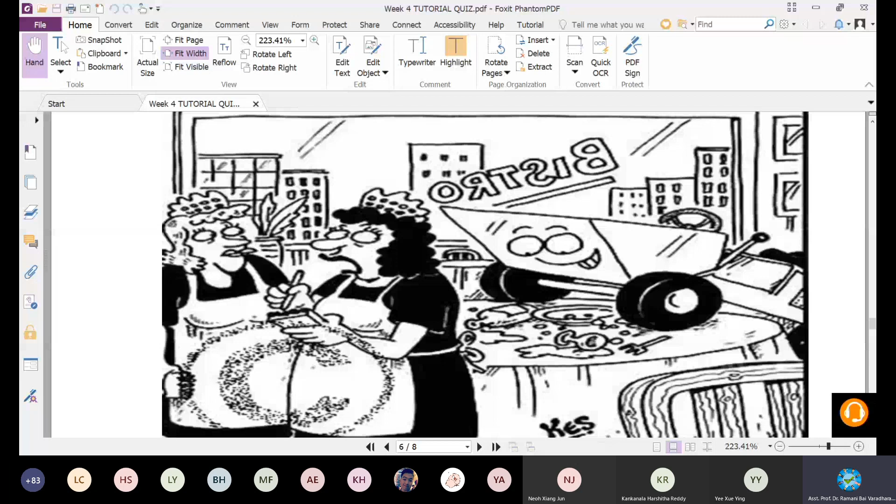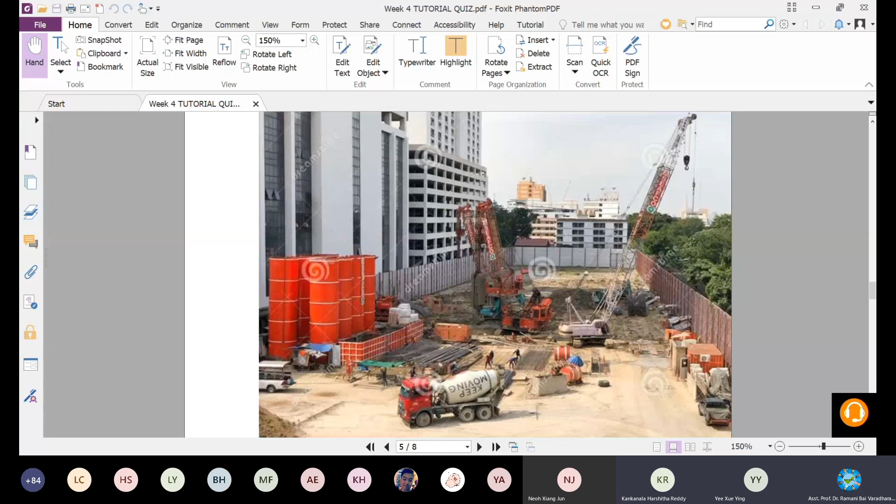Which picture do you mean, this question or this question? The previous one? This question? No, was not that one. Is this question? No ma'am, the other one. This one? Yes, this one.

What is the name of the construction machinery shown in the photo beside? Is there any construction machine or equipment used here, or is it some manual trolley or something? This trolley is called a tipper truck or tipper trolley. Tipper truck, okay, you can tip it for pouring and unloading, I mean loading and unloading. By tipping, it will work. You can load and unload materials from one place to another.

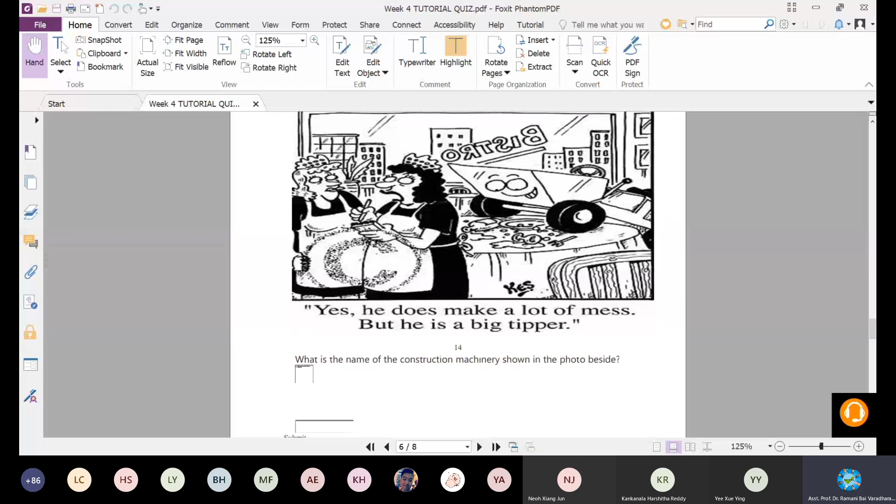This one, I mean this one, is a tipper trolley or tipper truck. Just write tipper truck also, or trolley also, the hint is there, a big tipper. Okay, any other question difficult for you? Did you answer all questions? Yes, all questions. Okay good, all picked from the slides. I didn't do anything new, but provided you learn by reading at least once, read all the slides, all the points given there.

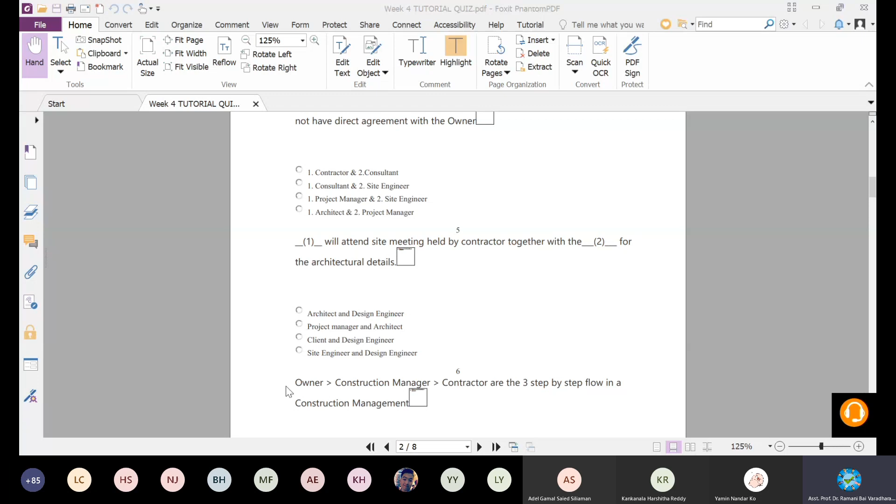Okay, let's move on to today's class. Is there any other question? If not, let's continue with today's class. Objectives are, number 1, I want to say about the amendments in assessment, because many of you are new today. I want to repeat once again what are the assessments you're going to have for this module, and there are some amendments from last week from the faculty, so I need to explain how the amendments happen.

And then second one, describe the roles and responsibilities of the safety officer. The last but not least is the safety officer you're going to learn in CLO1. You have to learn the roles and responsibilities of the safety officer in the context of safety at the construction site, safety and health for the workers at the site, and safety for others' benefit. Others referring to the public, outside the site, outside the working yard. How it's going to benefit others.

Safety at construction site.

Let's go to this one. Whenever we talk about safety, immediately you think of OSHA, Occupational Safety and Health Act. OSHA is an agency which is working for safety and health of the people at work. It will be covering many types of work.

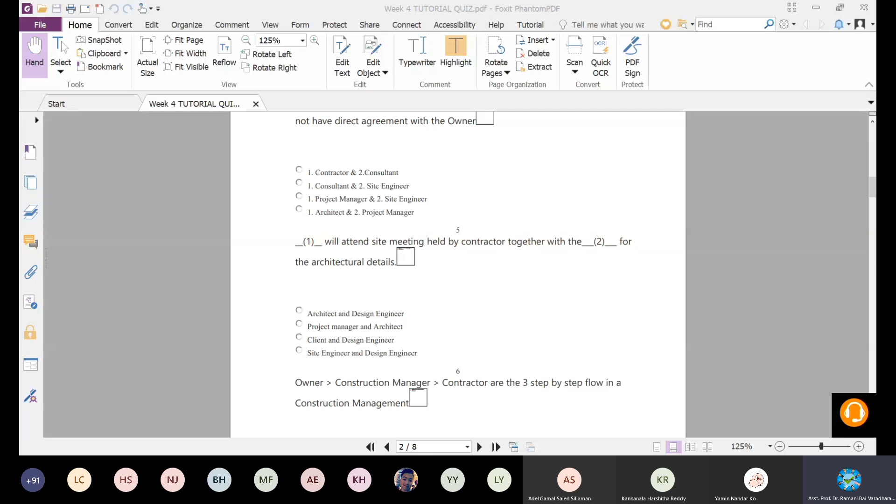It is not only construction work, but in this module you will study all about its regulations and act and benefits. Excuse me doctor, you cannot see the slide. Oh I'm sorry, you should see. Yes, you can see now. Yeah, yes, yes it's coming.

Today's objectives are two things: coursework assessment, amended coursework assessment. Second one, roles and responsibilities of safety officer in the context of construction at site, safety and health of workers at the site, and other benefits. And number one, course outline.

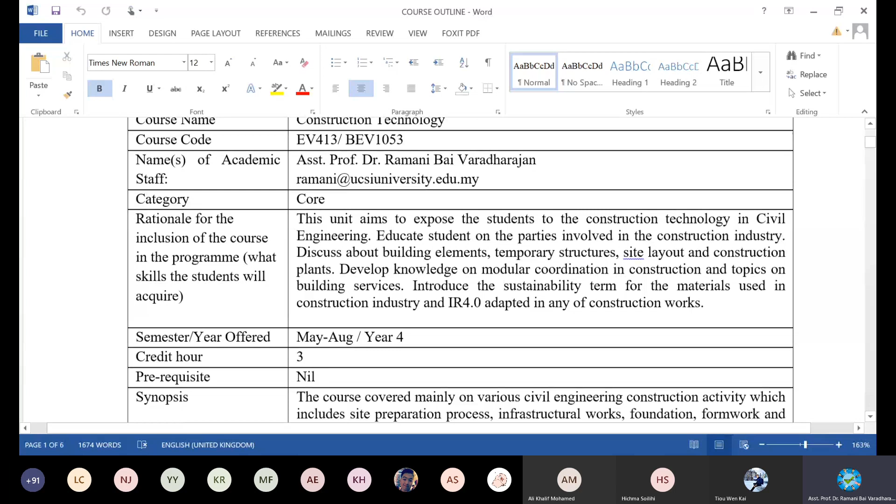Let me explain the course outline. Did you go through the course outline? I have posted it in the file section for you. This is the course outline I already posted in CN and also in MS Teams. All of you are taking the files from the files, isn't it? Under files, under materials, class materials, isn't it? Your class notes, course materials. Do you know or not? Are you taking it? Let me show you the one.

MS Teams, you go to files. Can you see the files? Do you not see? Yes. Under files, under class materials, I have posted all the class notes and course materials for you. Please follow, and then you can wait. Now you can see the course outline, right?

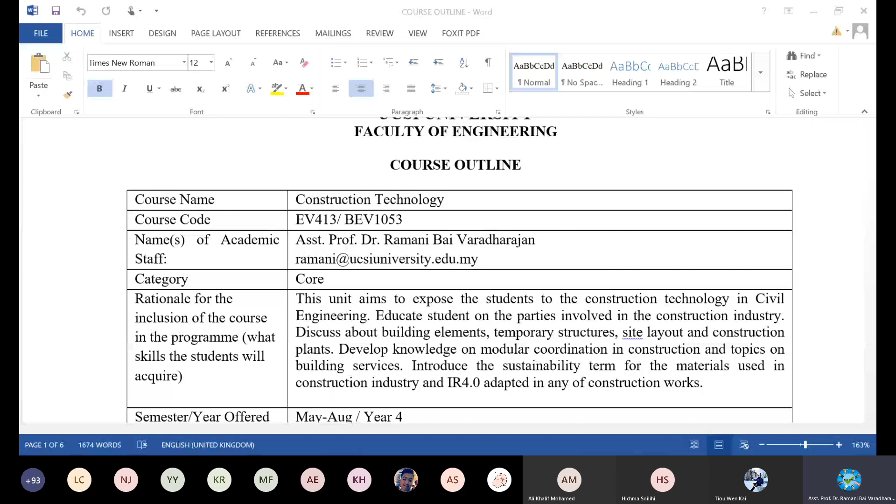In the course outline, you can see some changes in terms of the assessment. Can you see the assessment? All of you can see the assessment for May, August? Okay, assignment is changed to 20. Last time it was 40. They asked me to change to 20. Quiz as usual, 20%. Team presentation, 20%. Online final assessment, 40%.

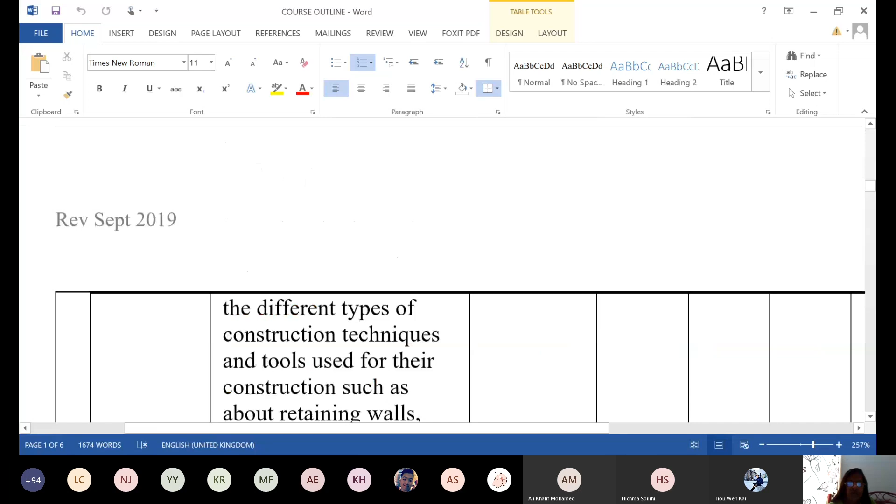Number one, assignment. This 20% assignment is question and answer based on CLO 1 to CLO 3, course learning outcome 1 to 3. Assignment will cover the first 3 course learning outcomes. About 10 questions I will give you. You can answer question and answer based on your textbook. You can refer to your textbook, past exam papers. Some questions I take from past exam papers, some from tutorials and so on. Okay, you can answer by referring.

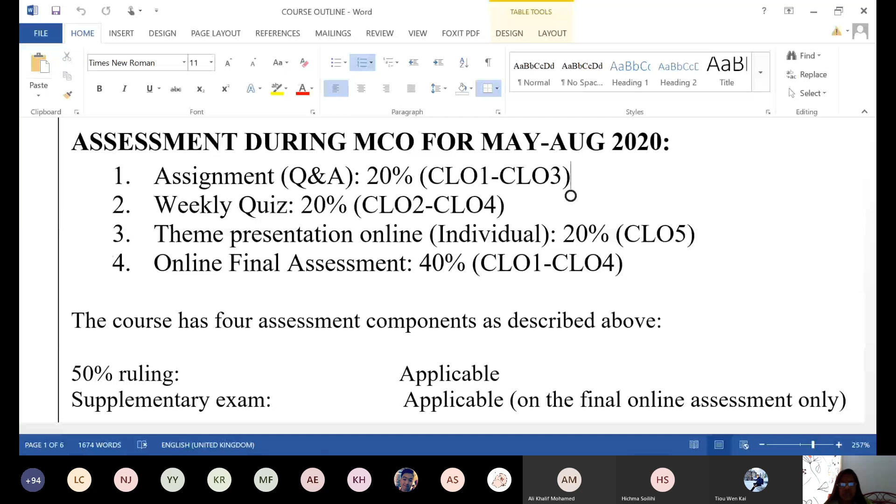Second one is weekly quiz. I will inform you, on the day I will inform you. Today is a weekly quiz which is marked, but only for attendance. By participating you are getting a score, so don't worry about the score. The quiz will be based on that particular week's lesson. Like today I'm teaching safety, next class about scaffolding and formwork, then these two topics will be your topic for quiz. Based on the class performance you can answer. There is no grading, don't worry, but participation is given 2 marks per class per quiz. So this is 20% means 10 classes, 2 marks per quiz. You'll be getting 20 marks for the 10 quizzes conducted during the class.

Third one is theme presentation online, which is individual. Please remember this, again it is for 20%. You have to submit the slides and then do the presentation for 3 minutes. It will happen in week 12 and 13. I will give you the schedule. You have to follow the schedule one by one. You will come online. All people will be there. You just present for 3 minutes. I call one by one. You need to present for 3 minutes.

It's like that, you're learning from peers, you're learning from your colleagues. Just take any topic in construction engineering or any real-time projects. You can talk about that for 3 minutes. Construction technology, related to construction technology, real projects, successful projects, ongoing or past projects, successful projects in the past or failures in the past. Just talk about construction related issues, real life issues, for 3 minutes. You can choose any topic related to construction, you need to talk for 3 minutes. That's important. You need to present only the slides, bring the slides, submit the slides, and do presentation. That's it. Slides can be just for 3 minutes, so you can hardly use 5 to 10 slides, that will be more than sufficient to talk for 3 minutes. And then this is for 20%, again CLO 5.

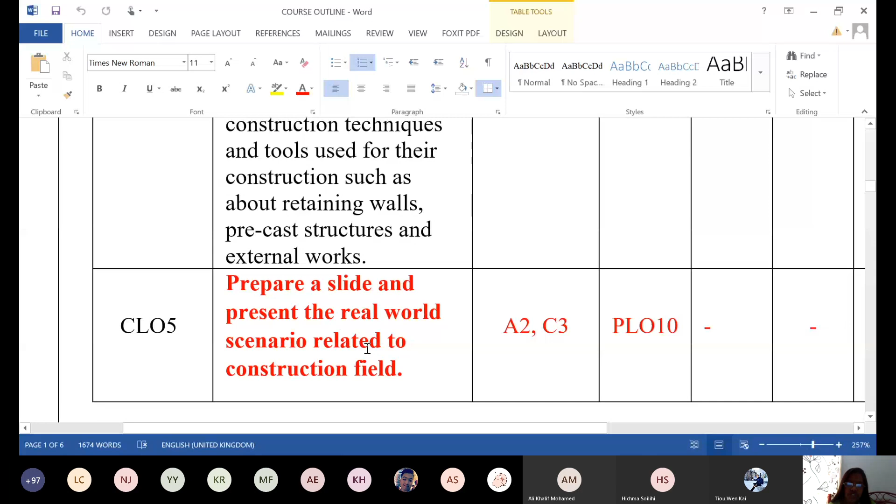Number 5 is mainly on communication. Prepare a slide and present a real world scenario related to the construction field. It's mainly testing your communication ability.

Last one is the online final assessment. Please remember, you don't have an examination. I think for other modules, most of them will have an online final examination, OFE. But for this module, you'll be having an online final assessment. That means you will be given problem-based learning, project type questions, and you will do a report on that particular topic.

The time duration given is about 24 hours. You can collect the material and arrange it according to the format given to you, submitted before the deadline. I repeat, the last one is online final assessment, not online final examination.

I will give the topic, a real world problem on construction technology. You will very hardly find it from Wikipedia or Google. It will be a kind of higher order thinking problem, open-ended. You need to analyze, that's why the time given is 24 hours. Maybe 2 or 3 questions, minimum.

You just answer the question based on the sections or rubrics, and return it before the deadline, which is 24 hours. It's marked for 40%, which covers all the CLOs, CLO 1 to CLO 4.

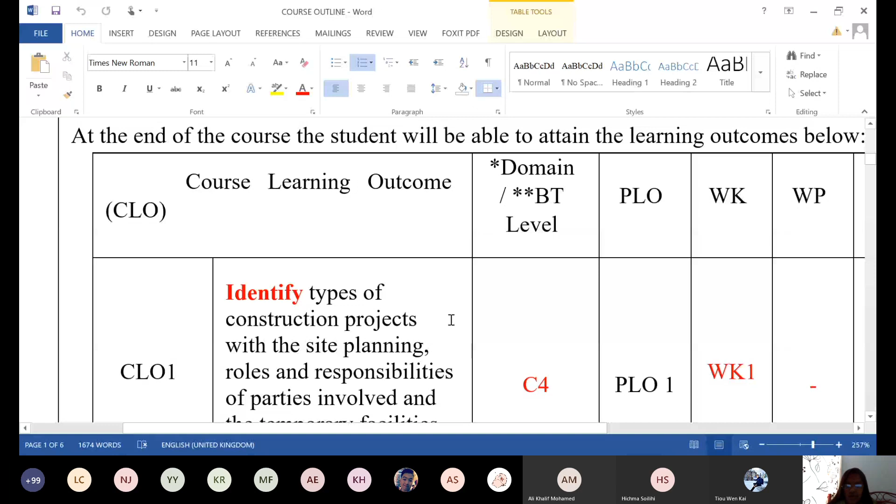CLO 1, you can see on the slide, the course outline, right? Can all of you view it? Yes. Okay, number 1 means covering the whole syllabus: types of projects, construction project roles and responsibilities mainly here, and then all the building elements.

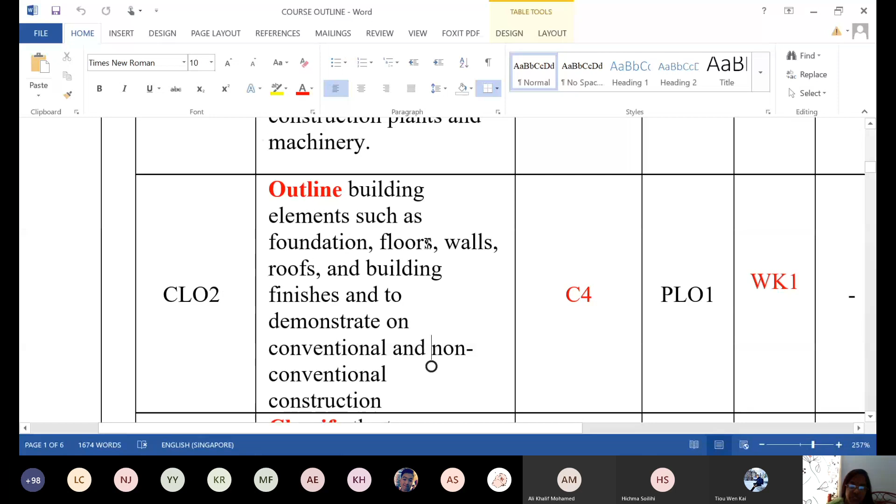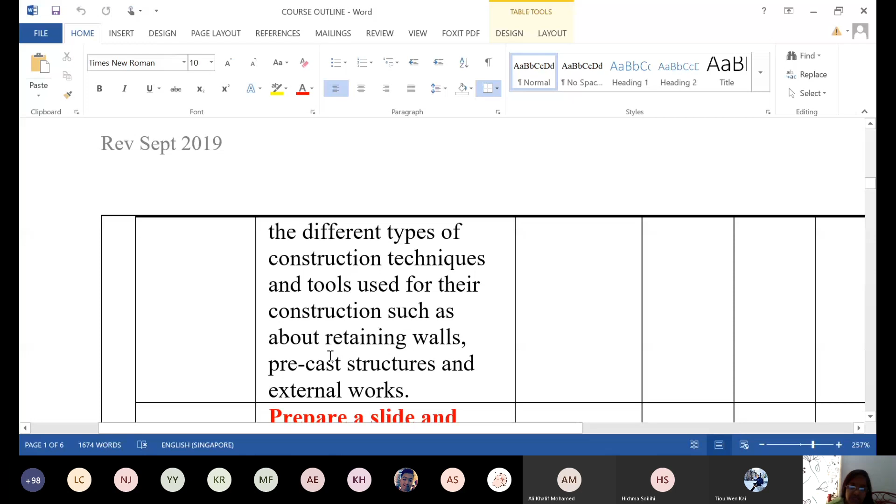Conventional and non-conventional construction, about building elements like foundation, floors, walls, roof, you will study. And then classify temporary structures, formwork, scaffolding, and distinguish between building elements, different types of construction techniques, tools, construction such as retaining walls, precast structures, external works, and so on.

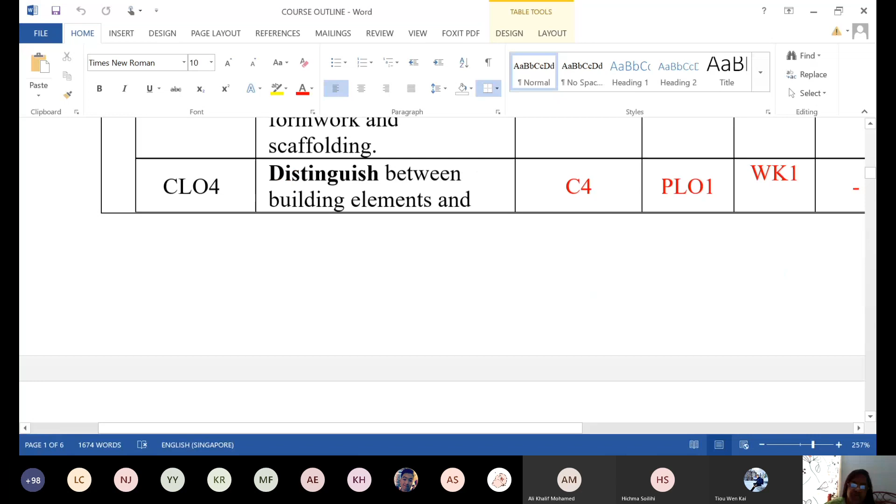So mainly on the elements of the building, roles and responsibilities of the parties involved, scaffoldings, types of buildings, types of building elements, differences, and elements of the building such as precast or fabricated works. These are the things you will be covering for your final assessment.

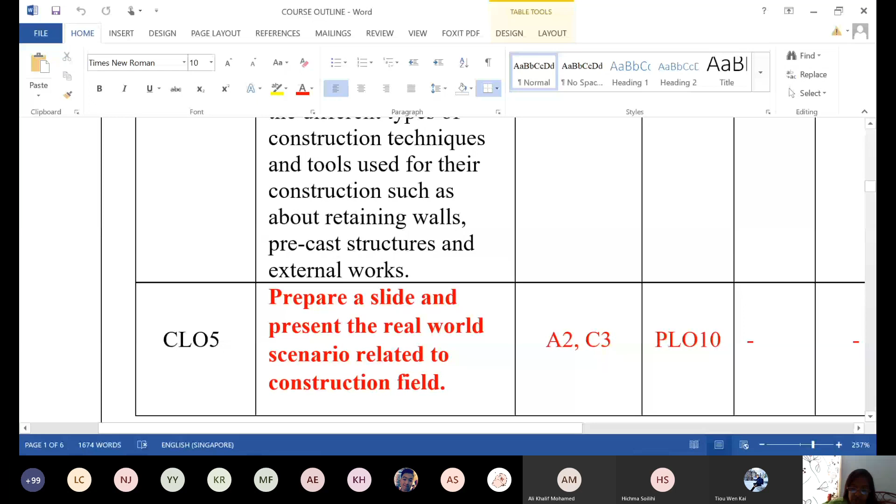Are you clear? Any question on the assessment? So for the presentation, when will we know the theme?

No, you have to choose the theme yourself. So we can start doing it now, right? Better to be on week 12 to week 13. You prepare your slides, start preparing your slides, choose your topic. Since it's individual, choose your topic and prepare your slides. But the presentation will be during class time, everybody will come online on MS Teams.

You will be the speaker on the day, I'll set you as a speaker. All right, 3 minutes only, just 3 minutes, hardly 3 minutes, not more than that.

Miss, for the assignments, is it all individual or grouping? All individual. I don't take the risk of group work, because otherwise you have to do meetings and show minutes of meeting. It's all individual, assignment individual.

Weekly quiz you are doing online during class time, and this is individual too. Okay, thank you Miss. Any other questions? Is your assignment clear? Yes. I'll continue with the class now.

Miss, I have a question. So the presentation topic can be the same, right? What do you mean? I mean, since we have almost 100 students, the topic they choose can be the same for some people.

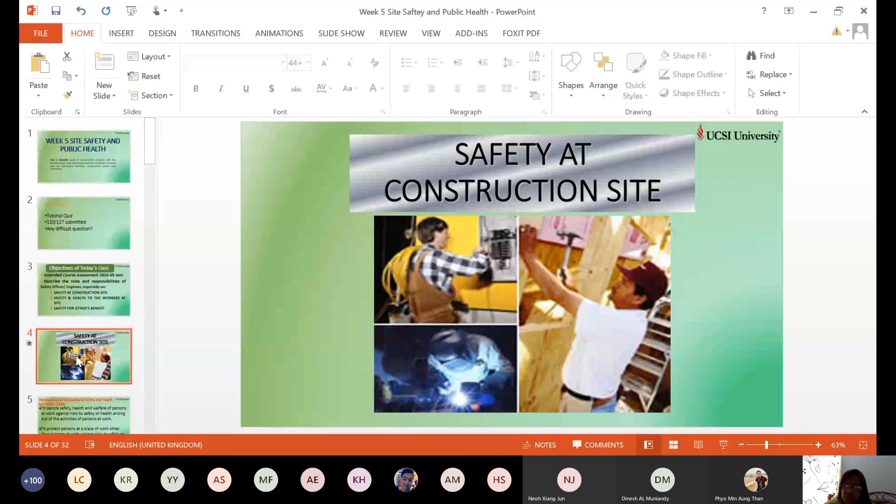There are millions of YouTube videos on safety, health, and welfare of people, especially on OSHA. You can type OSHA in UK, OSHA in Australia, OSHA in Malaysia - mostly you'll get it in Malay, but you can still get it in English. Some versions I have already uploaded. Each and every item and activity at the site is explained very well, with the norms and dimensions you have to maintain for equipment, machinery, people, materials, and so on. Just casually, you can watch those videos for more understanding on OSHA, safety and health at site.

Okay, where are we? Teacher - yes, if an accident happens, what will the safety officer do about that?

There are forms, there are regulations. You need to report to the supervisor, the project manager at the site, immediately. There are forms you need to fill in to file it.

It depends on the type of accident. You have to find out the reason first - file a case and then find out the reason. Is it caused by the engineer at the site, or due to materials, or carelessness of the engineer at site, or the design, or due to the architect? You must find out the cause and reasons first for any accident.

Then report to the person in charge, like the supervisor, project manager, or a consultant at the site - it depends on the project.

For further action, based on the strength of the problem, you will be penalized. There may be some fines, some legal issues, or both. You will be charged, fined, or sometimes both, depending on the value of the problem cost, the accident cost.

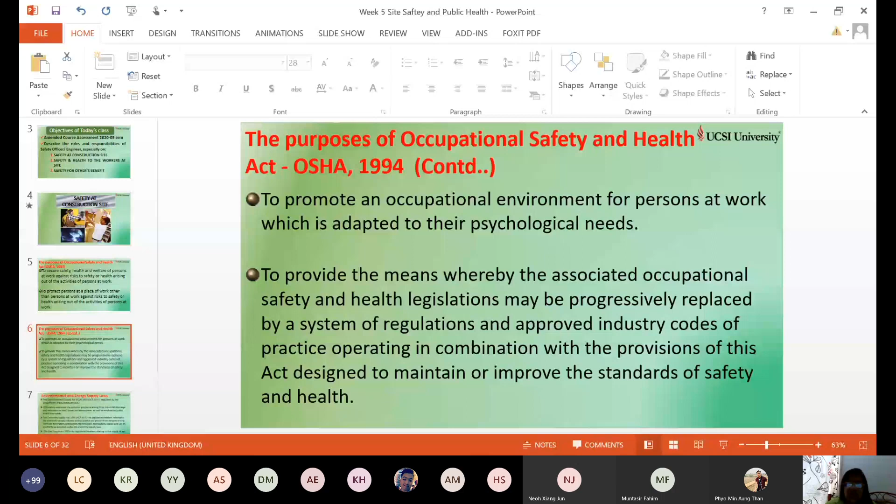So care should be taken by people at site, maybe the site engineer, field engineer, designer, or architect. Care should be taken at every stage to avoid any accidents, health issues, or faulty things.

Let's move on. It's not only construction at site, there are also environmental and energy supply laws. To ensure safety at site, there are laws and regulations, like getting approval for the site to acquire it and start construction. The inception of construction work starts with approval of the design and plans by the municipality and the professional engineer. You should also have all these things fulfilled.

Number 1 is the Environmental Quality Act. Number 2 is the Electricity Supply Act and Gas Supply Act. Your construction site should fulfill all these acts and regulations.

Number 1, the Environmental Quality Act, regulated by the Department of Environment. You have to get approval from them, and it mainly addresses pollution problems arising. You have to test the soil and water to make sure it's safe and up to standards for construction.

The Electricity Supply Act regulates matters relating to the electricity supply industry and protects persons from dangers arising from generation, production, or consumption. You have to make sure all electrical appliances used at the site - generators, motors, gas supplies - are up to standard, with proper ventilation, supplies, insulation, and materials used for electrical appliances under this act.

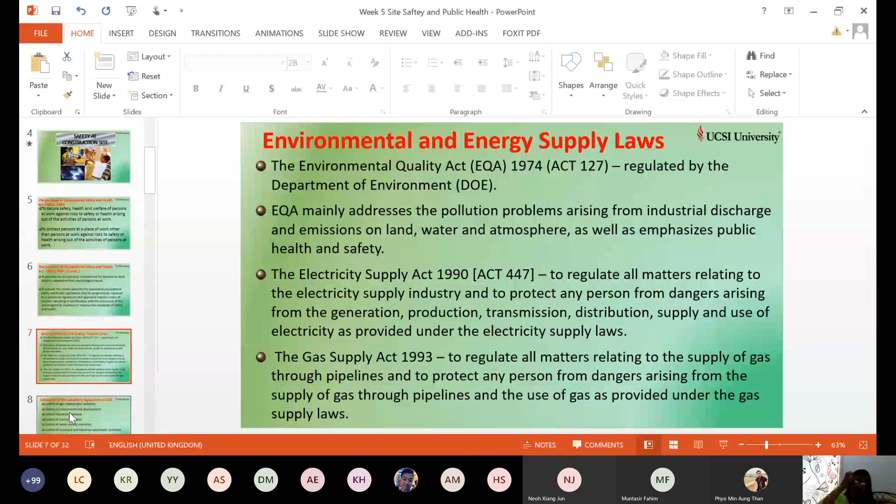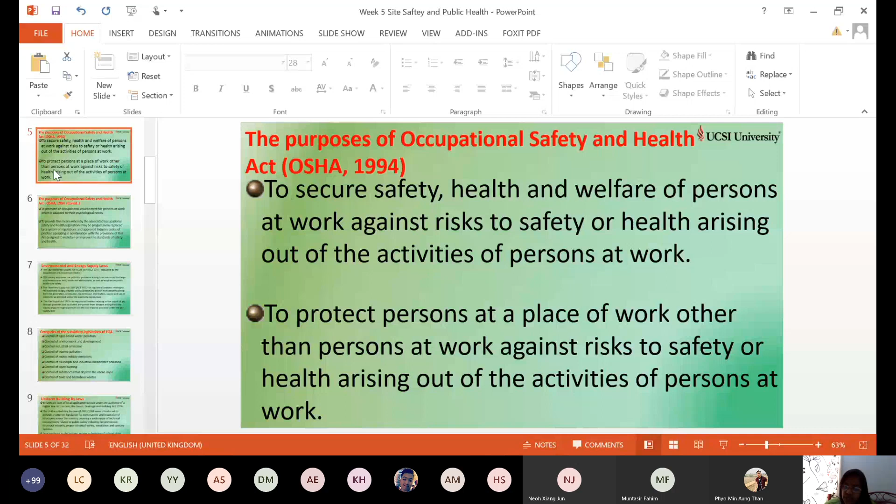Categories of subsidiary legislation under the Environmental Quality Act - there are about 10 regulations, like control of agro-based water pollution. Especially with OSHA, it's not only about safety and health, but also monitoring and control.

I already told you what quality assurance and quality control are - quality assurance comes before construction, control is after construction. You should also be aware of OSHA or the agencies working for safety and health. They identify problems, recognize issues related to safety and health, and also handle prevention and control. If you and your staff are aware of these problems ahead of time, you can prevent or avoid such accidents. But if it happens due to climate or unforeseen things, you should know how to control it.

For control, these acts include: control of agro-based water pollution, control of environment and development, control of industry emissions, control of marine pollution, motor vehicles, municipal and industrial waste pollution, open burning, and substances that deplete the ozone layer, toxic and hazardous waste. So more of carbon monoxide releasing substances and equipment you should avoid at the site, which will cause depletion of the ozone layer.

These are the things. Teacher, yes.

What does agro-based mean?

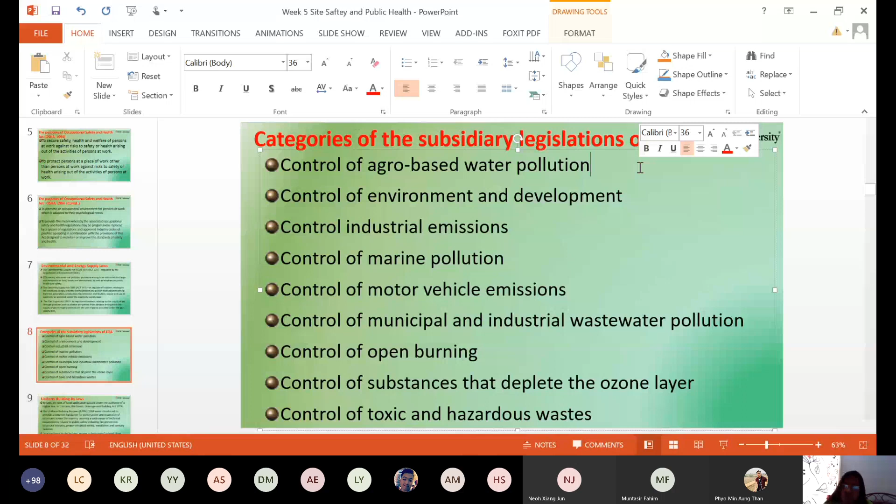Especially due to construction activities, these types of polluting agricultural land, polluting water bodies due to waste discharge from the construction site should be avoided. And then environment and development, industry emission, marine pollution, control of marine pollution.

But actually this is not related to our construction things, it's one of the acts under the Environmental Quality Act - motor vehicle emission, municipals, open burning - all these are general control, general legislations under EQA. But in this case, we will be having most of this type, and then environment and development, and some of the selective controls are coming under construction.

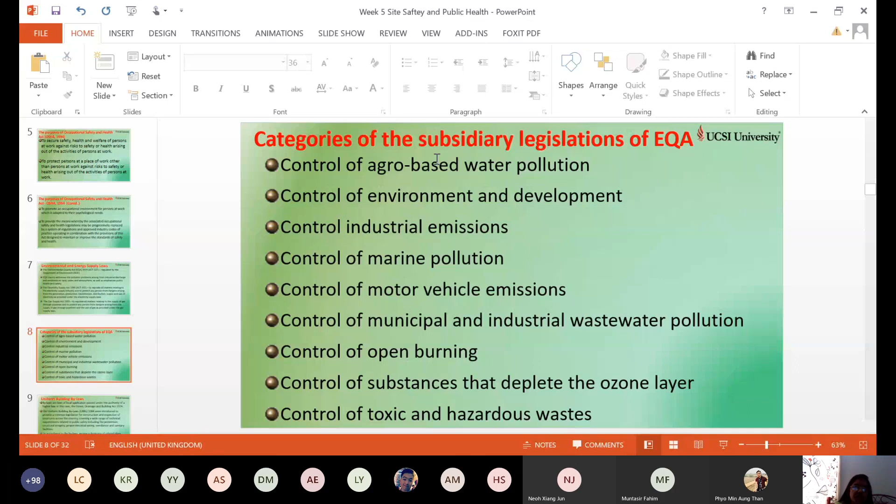And then next, which is directly related to construction, uniform building bylaws. Before this, I was asking you to go through bylaws, right? Initially it was called building bylaws, later changed to uniform building bylaws, which is taking care of only infrastructural work.

The uniform building bylaws were introduced to provide a common legislation for construction and inspection of structures across the country, covering a wide range of technical requirements related to public safety, including fire prevention, structural integrity, proper electrical wiring, ventilation, and sanitation facilities.

Okay, it is nothing to do with the main part of the building, like beams and columns and slabs, but related to all infrastructure which are related to structural integrity, or altogether, the structural integrity is like...

In a facility, do you have proper ventilation? Do you have proper fire escape? Do you have proper gas emission provisions, and so on? So it will check for the integrity of the structure, proper electrical wiring, ventilation, sanitation facilities.

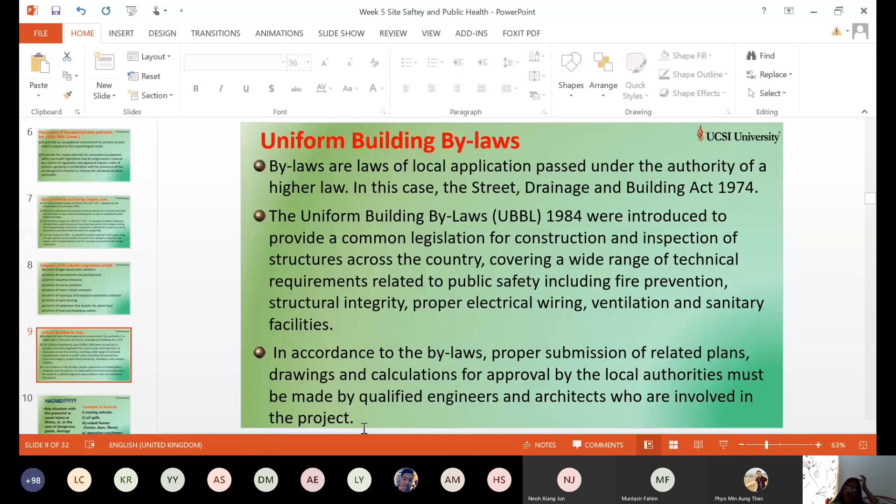So it will check altogether the safety and health of the dwellers. In accordance with the bylaws, proper submission of related plans, drawings, calculations for approval by the local authorities must be made by qualified engineers, professional engineers, and architects who are involved in the projects. So building bylaws takes care of the proper submission of documents for the construction.

Hazards. When you talk about OSHA or health and safety issues, two things you have to remember. In addition to knowing what should be the health issues, what should be the safety issues, you also need to know what are the hazards and risks associated with these construction activities. That is most important. Identifying the hazards will help you be prepared to avoid accidents, to avoid any risk or devastation or illness or disease causing.

Okay, hazards - what is hazard? Any situation with the potential to cause injury, illness, or in the case of dangerous goods, damage to property. So what are the hazards? What are the dangers - in one word, dangers. What are the dangers you should be knowing?

As a site engineer, you should be knowing what equipment will cause dangers, what materials will cause dangers, what activities will have high hazard during construction. You should be knowing these.

Example, moving vehicles. Very huge vehicles, especially in high-rise buildings, they are using tallest cranes which carry huge blocks, as I showed in the video. This should be carefully taken care of.

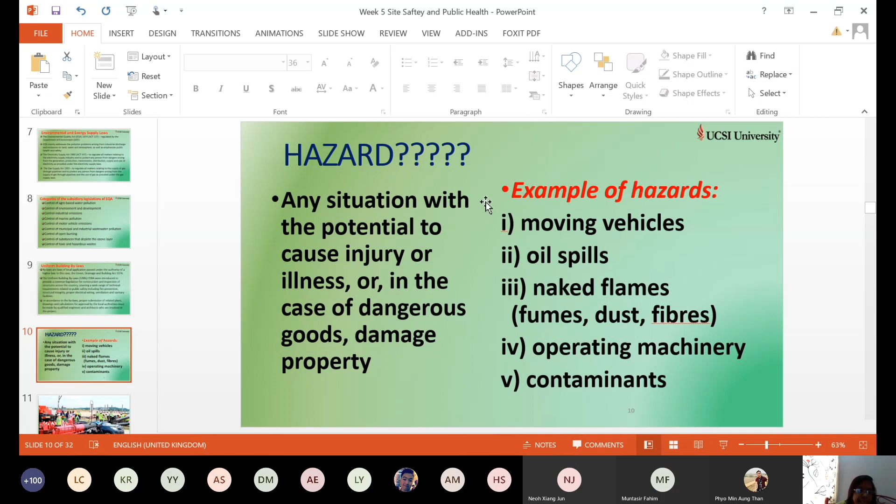Proper helmet, proper glasses, proper jacket, shoes, and boots. If they are working at a concrete site, they must wear the boots.

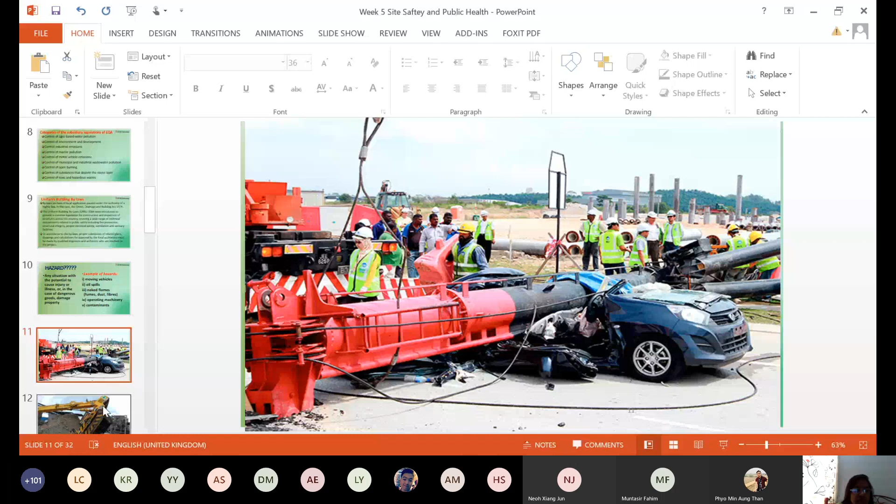Okay, next one. A huge structure like this - what is this equipment? What is the name of this equipment? Bulldozer. What is this equipment? That day, I think in second class, we studied some of these equipments, right?

Crane. Okay, what is it doing? It is operated by the crane. What is it doing? It has got into an accident. Accident, what do you mean? Overloading. Lifting - lifting what? What do you call this type of work?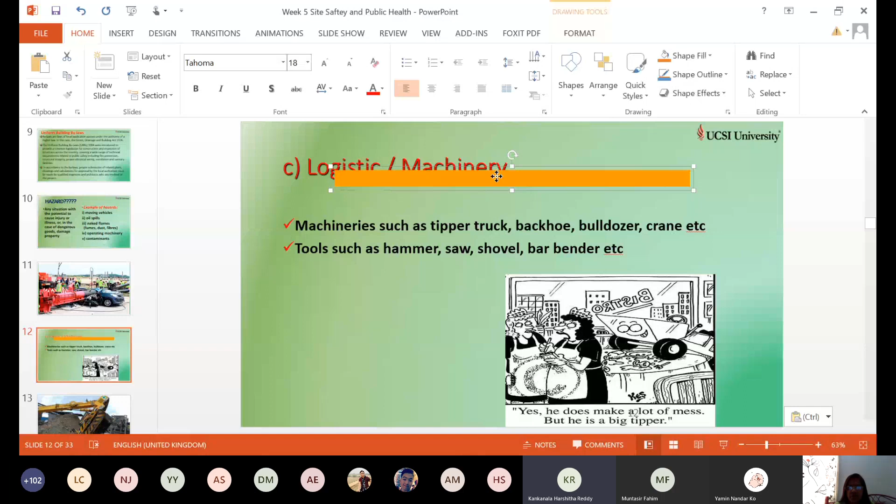Remember this slide? Sorry, this one - the machinery used at the site: tipper truck, backhoe, bulldozer, crane. This is called a bulldozer. It is doing the excavation.

They are used for excavation of soil. In olden days, a man would be doing this work, but nowadays for huge projects it's done by bulldozers like this. They are removing material soil from the ground to construct the foundation and footing. They are removing the soil from the ground, mostly used for cutting soil from the ground.

At this point, it is actually removing soil which is dumped at some site. The soil is dumped - maybe they excavated somewhere and dumped it here. It is now removing, clearing the soil.

Sometimes you can see, most often in Malaysia and very hilly places, they excavate the mines - maybe a coal mine or limestone from hilly areas. They have to remove it. They're using these bulldozers to remove these types of soil from one place to another, or for excavation of the ground.

They will use this bulldozer, and this is connected to the crane, connected to the motor. The operator sits somewhere here to collect the soil or replace the soil from here to another place. Mainly used for excavation purpose. We can call this a bulldozer.

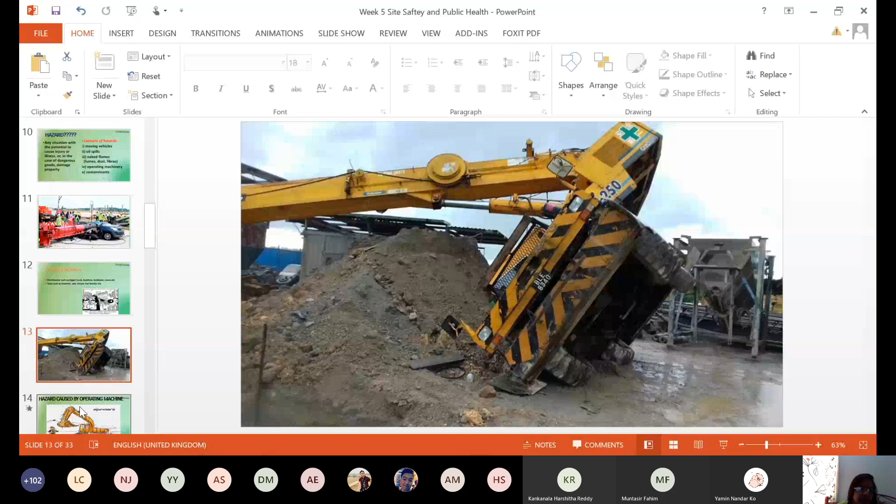And this one - operating machine, another type of hazard. Here again the same type, it may be used for collecting concrete or collecting materials.

Section 2: employer's duty to employees - to provide and maintain safe plant and equipment and safe system of work. Okay, see here, the man passed by.

Whenever the truck carrying the bulldozer is started, you should check whether people are around before starting the truck. The supervisor at the site should make sure the site is clear of any public passing by, or any animals or living beings - maybe a cat or dog sitting below the pan - and once it is lifted, you can see the danger behind.

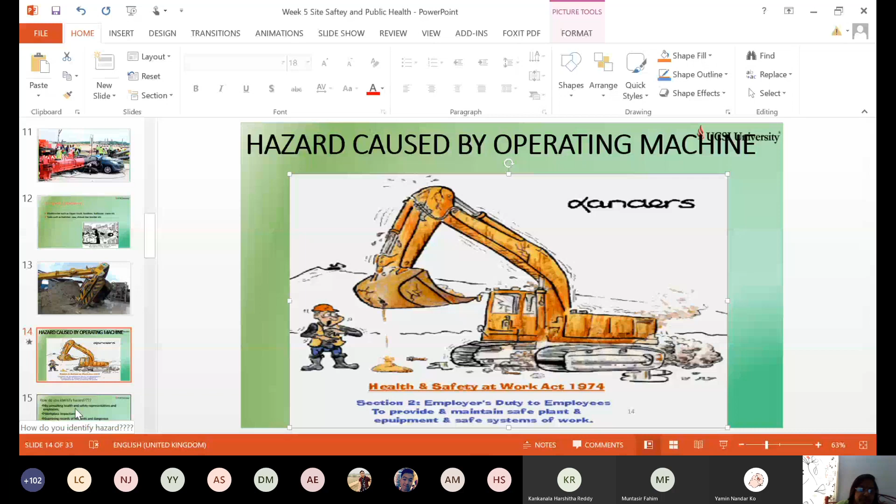So you should make sure that it is away from all these hazards and people around. Check for the people around, then start the machinery. That is important. How do you identify the hazard?

Identification of hazard itself is most important in OSHA. I keep repeating, identifying the risk or recognizing the hazards, and quantifying them. Possibly you can quantify. Risk assessment managers, economics and businessmen can help you quantify how much is the risk, how much is the hazardness due to handling a particular equipment or particular group, or even a group of people can be a hazard sometimes, handling at site. So you have to quantify and recognize the hazards and risk at the site.

We come to this point, hazard, by consulting health and safety representatives and employees. Workplace inspections. So you need inspectors, building inspectors I mean to say. Building inspectors are the ones who can quantify and check for the safety of the people, safety of the workers at the site.

Examining records of incidents and dangerous occurrences in the workplace, keeping up to date with information released about particular products and processes, contact with other workplaces using similar processes. Combination of these ways would create an effective method in identifying hazards. So as a site engineer, you should keep checking who are all the, one moment.

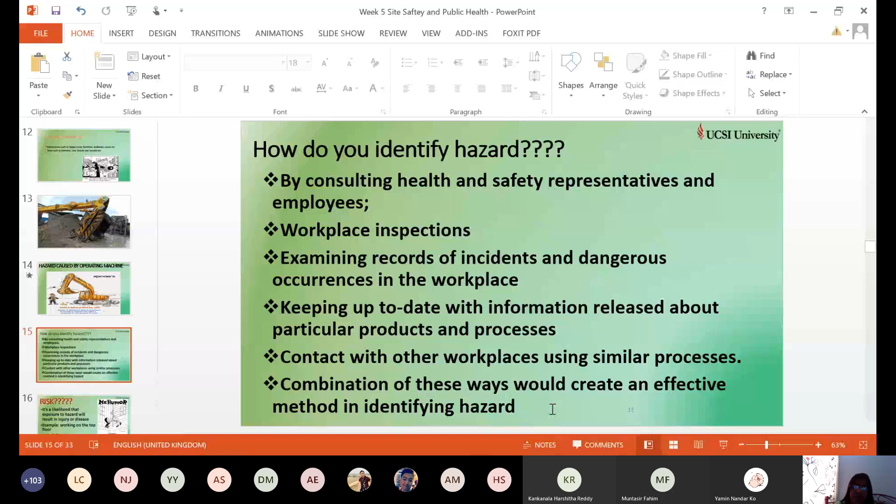Risk. It is a likelihood that exposure to hazard will result in injury or disease, right? Especially people falling from height, people falling from openings, small openings. Maybe he's working at the window, it is yet to be paneled. Suddenly there is a chance that he can get slipped into the hole.

Example, working on the top floor, risk of falling down from high. These are the things you should be aware of first of all, and you should be instructing your subordinates or the workers at the site properly.

Let's view this video for a while so that you will understand. Now, what is our current problem in Malaysia? Global, what is our global issue now? COVID-19. Come on, let's see how people are prepared to work at site during COVID-19. I share this slide, you can watch the video. It's a nice video I've come across, it's a borrowed one. You can check through this video. It's playing for just a few minutes, about 3 to 4 minutes I think. Let's watch this video.

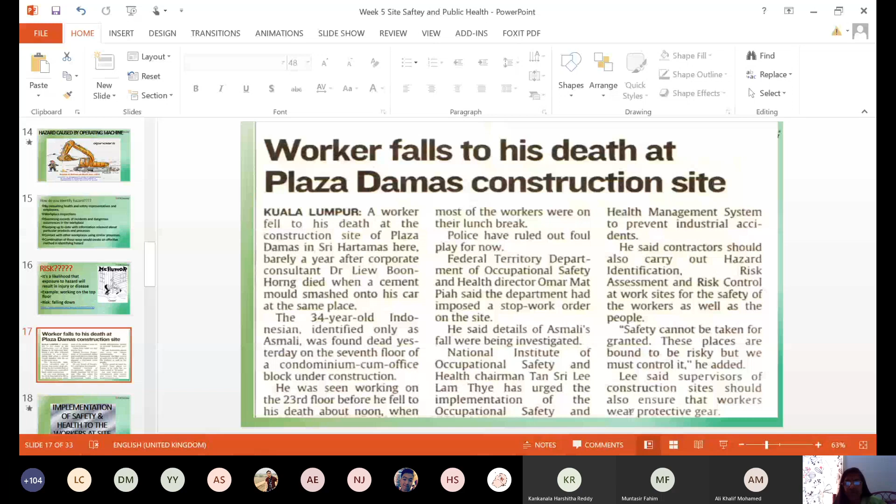This is one example case, and you can see many cases like this all around the world. Next is implementation of safety and health to the workers at the site. So far we saw general issues about site safety and health, and now this is particular to the implementation of safety and health to the workers at the site.

Start with workers. Taking care of workers' health is important. You should have a proper internal clinic. Health is an important factor to be taken care of in order to carry out work safely. You must check their health every day so that they are working, and there is an output and performance at the end of the day. You have completed a particular job, maybe flooring or foundation work on the day.

Workers must be provided with enough food so that they can work properly. You have to make sure they are properly fed. The mental health of workers must also be considered, including their way of thinking, not being sad, their attitude, and behavioral aspects of the workers at the site should be taken care of.

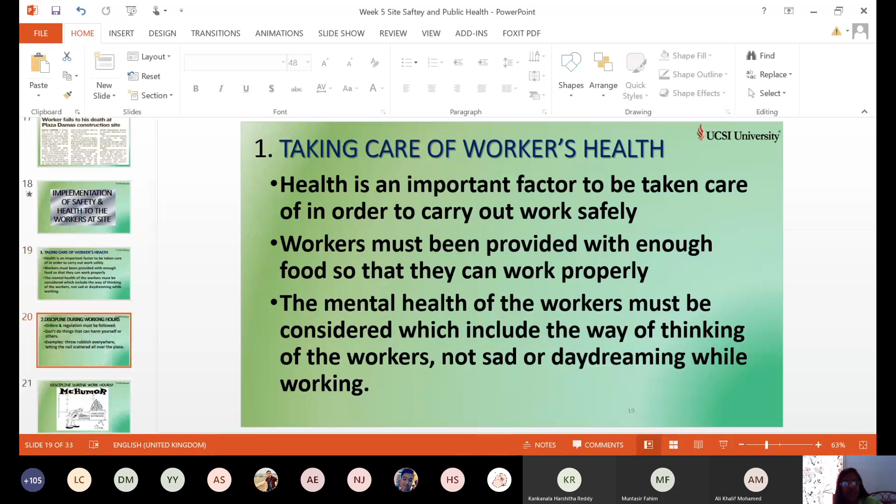Discipline during working hours. Orders and regulations must be followed. Don't do things that can harm yourself and others. Check for people who are wrongdoers or misbehaving, for example, throwing rubbish everywhere, letting nails scatter all over the place, or chips of materials.

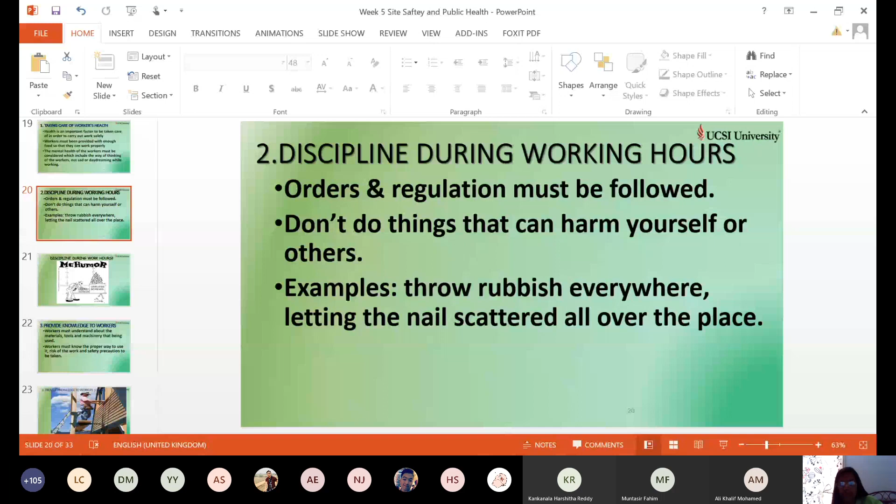Or cutting materials and pieces of material waste, construction waste left at the site everywhere, not clearing off the hazards behind. If the hazards or construction waste at the site are not cleared properly on and off, that is a discipline issue during work hours.

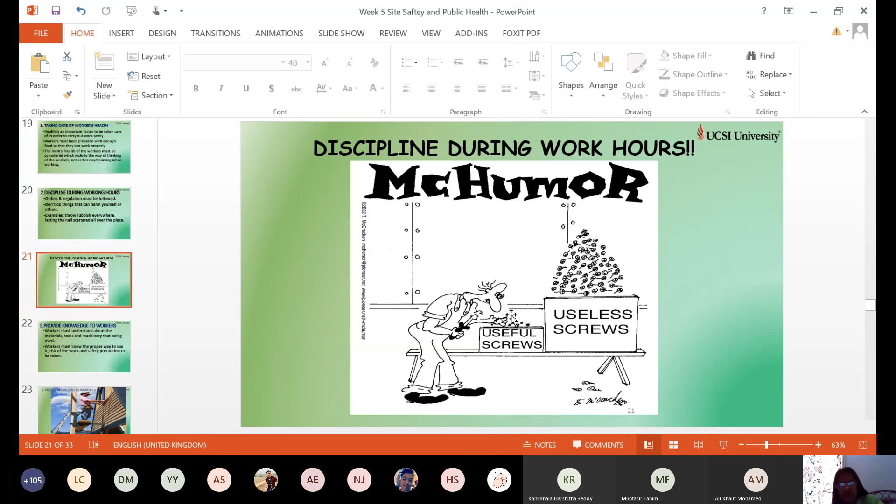Here, useful screws versus useless screws. You need to arrange or sort them out, identify which are useless screws, and keep the useful ones. Don't dump them all in one place and keep searching for them, wasting time during construction. It should be well organized in terms of storing materials.

Provide knowledge to the workers. Workers must understand the materials, tools, and machineries being used. You should know what has already been explained to you. Whenever you receive equipment or material, you should read the label for its expiry date, quality, strength, handling instructions, and storage instructions.

And another point: workers must know the proper way to use equipment, the risk of the work, and safety precautions to be taken. For this, you may undergo training often as a site engineer, or you will be training your subordinates, your workers at the site, your engineers, and your helpers.

Keep providing training on and off for the people at the site. If it is a big project, a corporate project, you should have proper training on and off for the people at the site and also at the construction project. By that, you can make sure they are aware of the safety issues and avoid accidents.

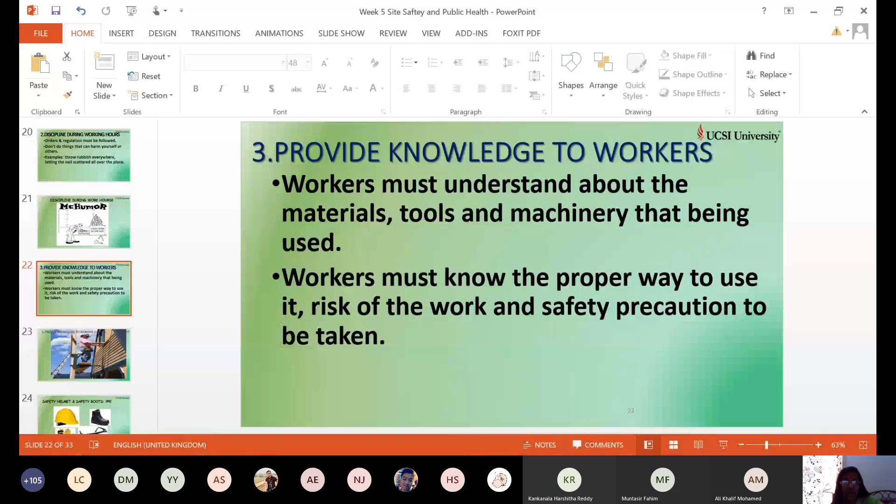Provide knowledge to workers, especially since they know very well, but in addition, as a supervisor at the site, you should make sure that when they are working at heights, they are properly attired and properly anchored to the belt, to the frame that they are supposed to work on.

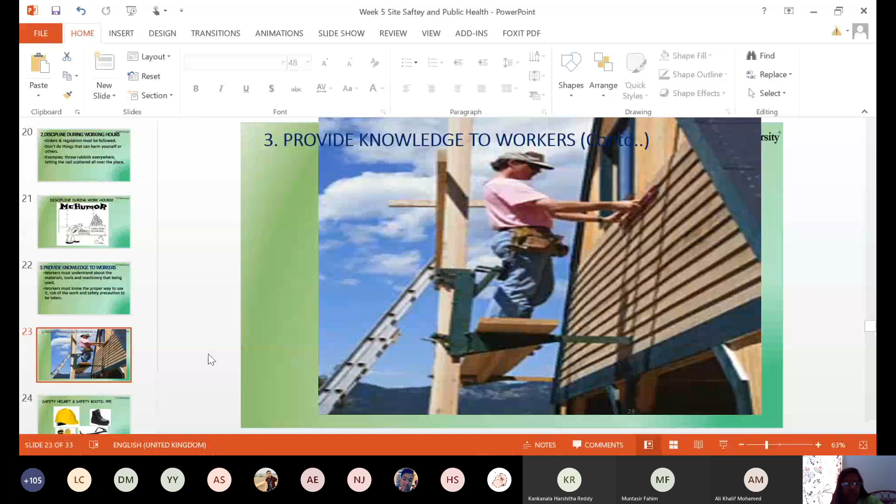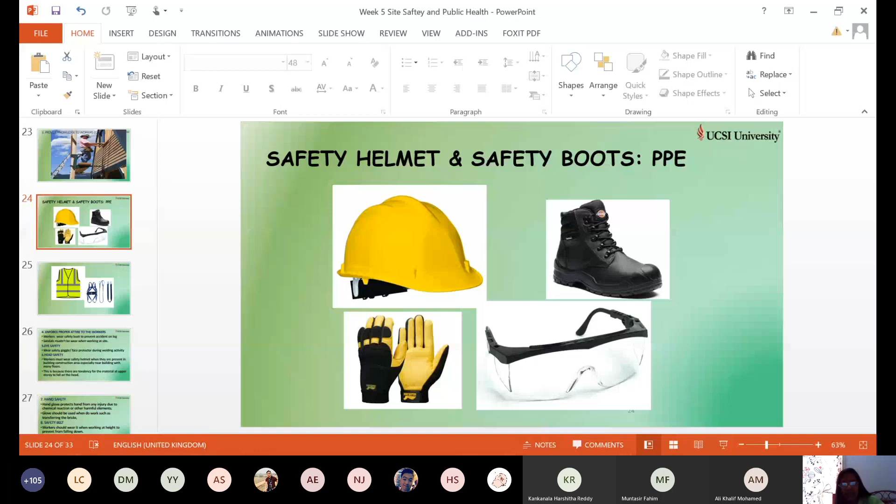Enforcement proper. You have to enforce the workers at the site to properly attend using all these equipments like helmet, boots, and the belts, the jacket. Sometimes if they're working at night, they have to carry a lamp on their head. Enforcement of proper attires to the workers.

Workers wear safety boots to prevent accidents on legs. Sandals must be avoided at the work site. Eye safety: wear safety goggles or a face protector during welding activity.

I have seen people, some of my students who have gone for training, when they come back their faces are reddish with rashes. They got all these rashes out of their interest. They have been staying long at the site and got affected. They got a health problem later on.

So you should avoid this by using proper cream, sunscreen, glasses. Proper attire, mainly proper attire, the safety goggles, and creams you have to use at the site, all right?

Because the site engineer is always there, the whole day they have to be there. They are the one starting the work, ending the work. So they must be properly protected bodily, mentally, and behaviorally.

Eye safety, head safety. Workers must wear the safety helmet, a hard helmet, at the building site to avoid any material falling on their head. This is because there is a tendency for materials at the upper story to fall on the head. This is one thing. And there are other outsiders or passers-by - how are you going to protect them? I will explain later.

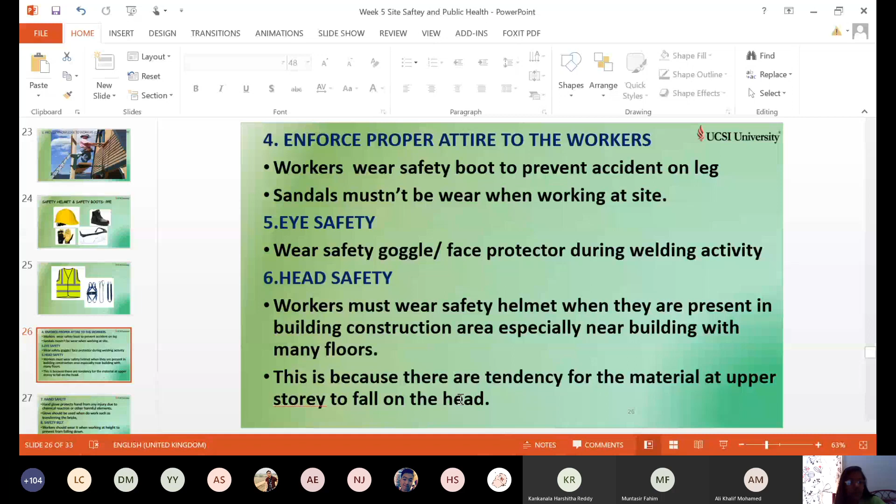Hand safety. Hand gloves protect the hand from any injury due to chemical reaction. Especially you have to use gloves when mixing chemicals, mixing plastering materials, mixing paints, mixing concrete. Sometimes people will get rashes or burns when they mix cement, high quality cement, strong cement or lime. They have to use the gloves.

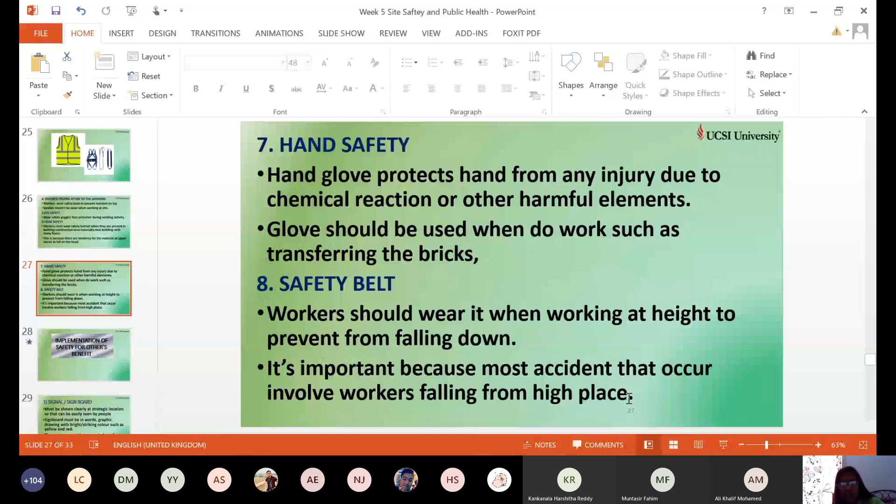Safety belt: workers should wear it when working at height to prevent falling down. It's important because most accidents that occur involve workers falling from a high place. So especially for people working very high up, you must make sure that they are wearing a safety belt and are anchored properly.

Implementation - so far we saw all the people inside, and now we see outsiders passing by. Maybe a person coming to load the material, unload the material, clear the waste, or people cleaning the site, or people passing by, like I said, there is construction work going on beside the road. All people who are traveling along the road, the passers-by, may get affected by materials falling from the site.

Signals and signboard - how do you avoid this? By providing signals and signboard. They must be shown clearly at the strategic location so they can be easily seen by people. Before they approach the site, you should clearly show them that there is construction work going on by providing proper cones, proper signages, proper boards, proper tapes, so that whenever they pass by the limit, they should know there is construction work going on.

Signboards must be in words, graphics, drawings with bright striking colors such as yellow and red - yellow background with red color letters, or yellow background with black color letters, which is prominent to people going by.

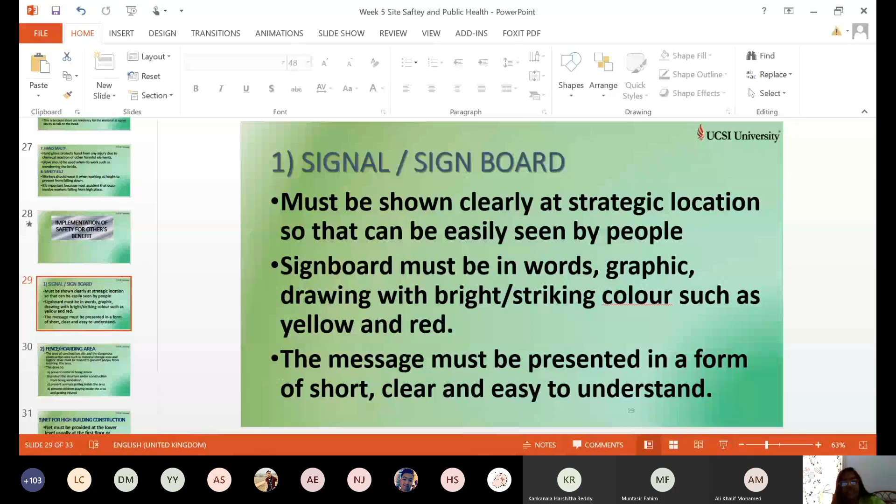Signboards are important for the benefit and safety of others. You have to provide signages and signboards, including for people at the site, fencing and hoarding around the construction site and dangerous construction areas.

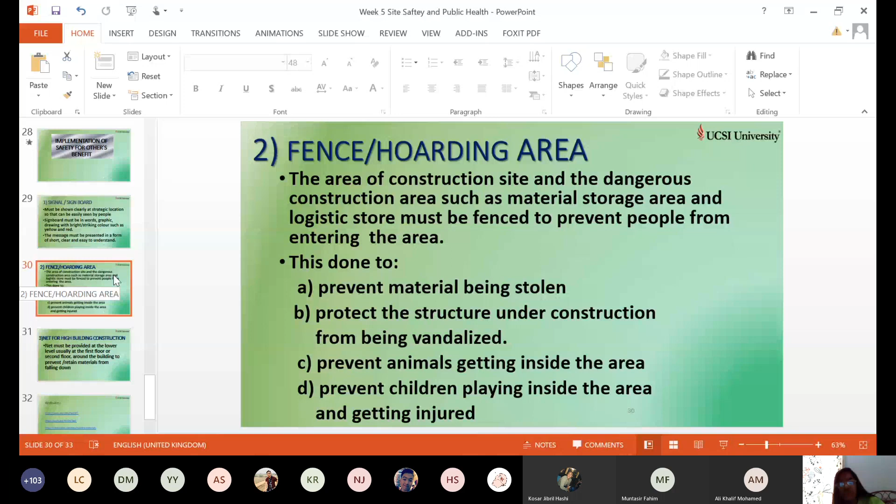The work site may be in the outskirts of the area, for example a water treatment plant construction, which is normally built at the outskirts of the city. There are chances of cattle or villagers passing by, and they may get into hazardous incidents which affect the people living there. So materials, especially chemicals that are stored, should be properly fenced, labeled, and protected.

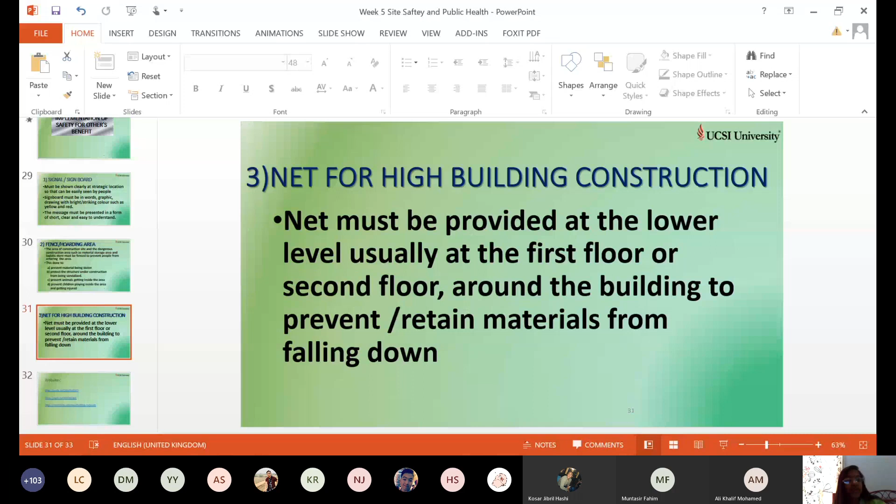I want to say something about the evolution of safety, health and welfare - OSHA, an agency for safety and health of people at work. It started in 1974, and they came out with proper formulation in 1994. Recently they've had amendments in different years like 2010, 15, 17, and now 2018 is the recent one, with 2019 coming too. They keep improving the safety and health related laws and regulations. The recent one is prevention through design.

While designing, while the architect is planning the site, the architect and design engineer should plan in such a way that there is safety. They have to get approval for the safety of their design, dimensions, detailing, and reinforcement, everything checked by the safety officer. They have to prevent these types of accidents and hazards during designing and planning itself - that's a new concept. Many people are involved, many rules and regulations make it complicated, more complex, but still it is safer. As I told you at the beginning, the number of fatal accidents globally due to construction is standing second in the world.